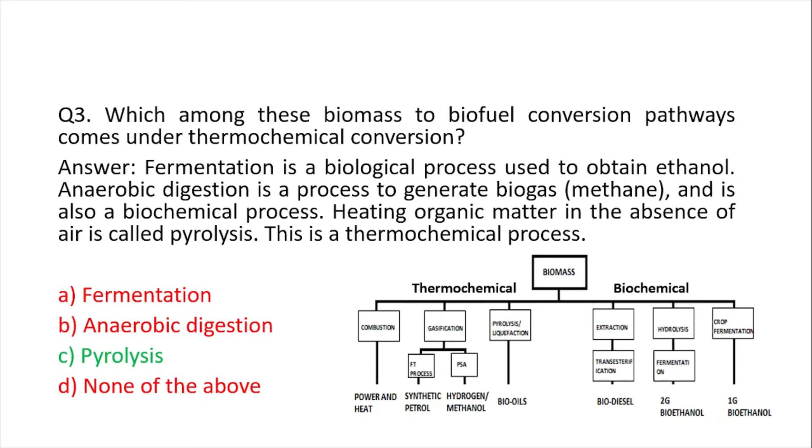Essentially, to enhance the ethanol industry in India, the government has introduced certain measures. The first measure was the use of multiple feedstocks. Then there is differential pricing, which is basically having different feedstocks to produce ethanol.

Like B heavy, C heavy molasses, sugar syrup, damaged food grains, or maize, and surplus rice from the Food Corporation of India. The difference between B heavy and C heavy molasses is they're byproducts of the sugar industry, obtained at different stages of the refining process, and normally C heavy molasses has higher sugar content and is easier to convert into ethanol.

So this costs less - the cost of converting C heavy molasses into ethanol is lower than that of B heavy molasses. So based on the feedstock used, the government said they will procure it at different rates based on the costs incurred. That is known as the differential pricing policy.

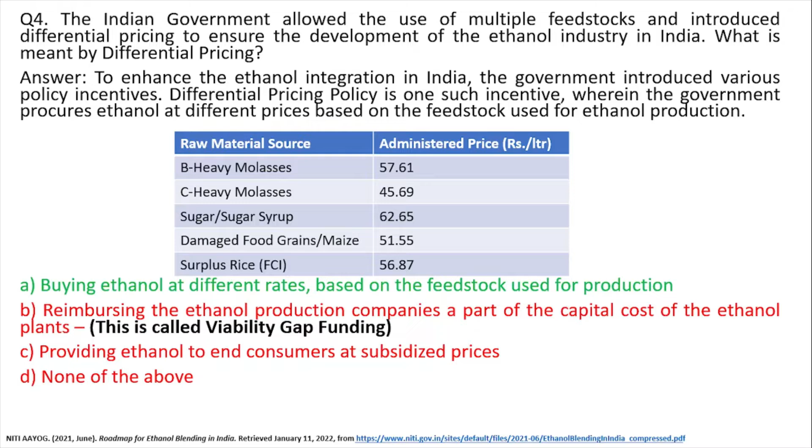And option B, reimbursing the ethanol production companies a part of the capital cost of the ethanol plants - this is called viability gap funding. This is also part of the policy for second generation ethanol, but for first generation, not so much.

The next question: why is biomass considered a carbon neutral source of energy?

Biomass is basically recently living organic matter derived mostly from plants, though there is animal matter also. Plants absorb carbon dioxide and release oxygen through photosynthesis. The CO2 that they have absorbed is the same amount of CO2 that is released when you combust biomass. Because of this, there is no new CO2 being added to the atmosphere, so we consider this carbon neutral.

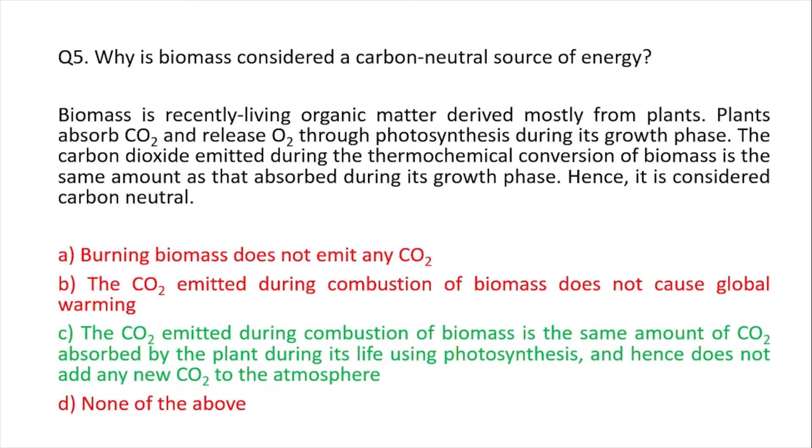Number 6: electric vehicles have no tailpipe emissions, but they also contribute to greenhouse gas emissions. So how do they do that?

There are two things here. First is manufacturing of the electric vehicle components, which requires electricity as well as other resources, so indirectly the manufacturing process also emits CO2. But also during charging, since we are using grid power for charging, we don't have any solar modules for charging yet.

80% of the total electricity was generated from coal in the month of February 2020. This is from thermal power plants that includes coal, natural gas, and oil. Renewable energy is about 10%, hydro 7%, and nuclear is 3%. All three are non-polluting, as in they don't emit any greenhouse gases, but 80% comes from coal. So that is an indirect emission, even though there are no tailpipe emissions.

So your answer is both A and B.

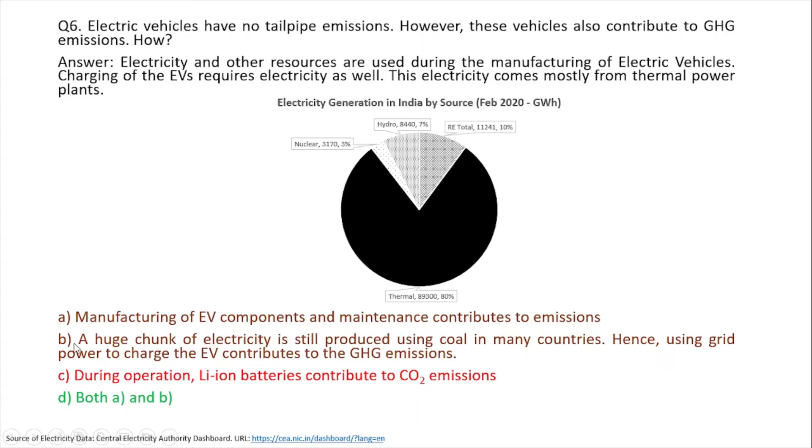Question 7: why is the sustainability of first generation bioethanol under debate despite its potential to reduce the need for fossil fuels? Initially, when you consider the environmental aspect of it, when you flood the agricultural fields...

Especially during the cultivation of rice, it creates anaerobic conditions for methanogenic bacteria or microorganisms to produce methane. Globally, 20% of methane emissions come from agriculture. There are also nitrous oxide emissions that arise from the use of nitrogenous fertilizers like urea. These are the environmental reasons.

Then we come to the social aspect of it. Diverting food grains and crops towards ethanol production, there will be a shortage of food. For instance, in India, the Food Corporation of India has allowed ethanol plants to use their surplus rice and surplus grains for ethanol production. These are perfectly good grains, so if we require those grains in the future, it will be a problem.

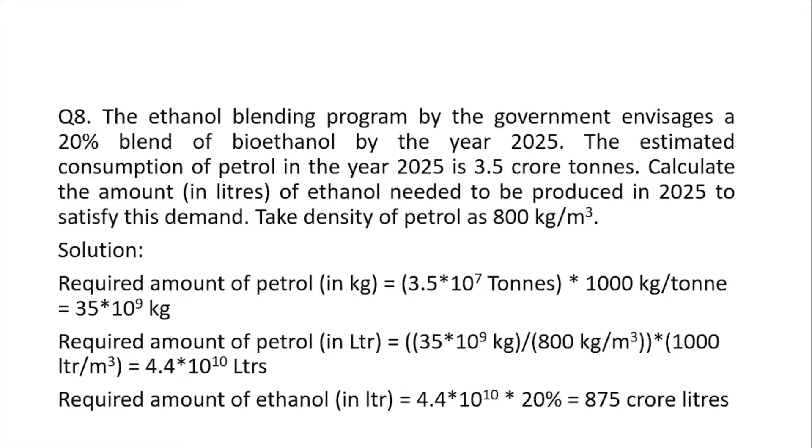So when we go for biofuels, as they are considered carbon neutral, the tailpipe emissions of carbon dioxide are all carbon neutral, so there is no new addition of carbon dioxide in the atmosphere. So this absolute value of emissions during fuel consumption will come down, although there will be some emissions during fuel production, manufacture, and maintenance. There is a huge opportunity here if we use biofuels.

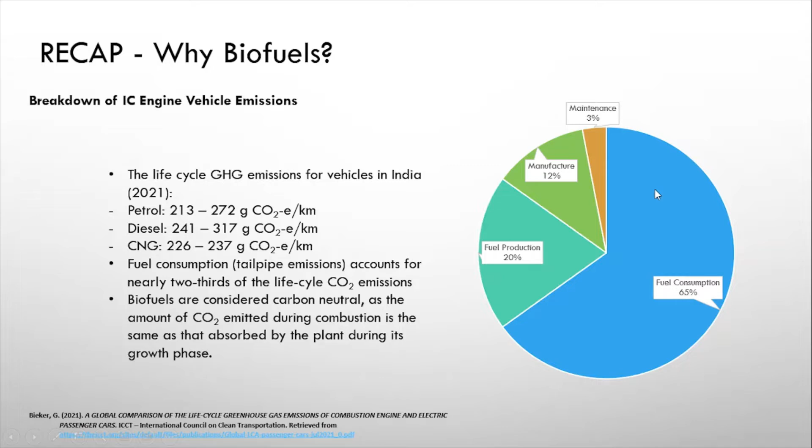A quick recap on the policy efforts in India: since 2003 onwards, there have been ethanol and biodiesel policies. In 2003, the target was 5% ethanol in petrol; today we have 20% as our target by 2025. But over the years, lack of availability of feedstock has stalled the entire ethanol program. In recent years the government has addressed certain bottlenecks, like I told you last week, and because of that we are at 10% right now, well on track to achieve 20% by 2025.

You can also see biodiesel here. A target of 20% was envisaged in 2003 itself, but now in 2018, the national policy on biofuel envisages only 5% by 2030. So you see there is a huge drop here.

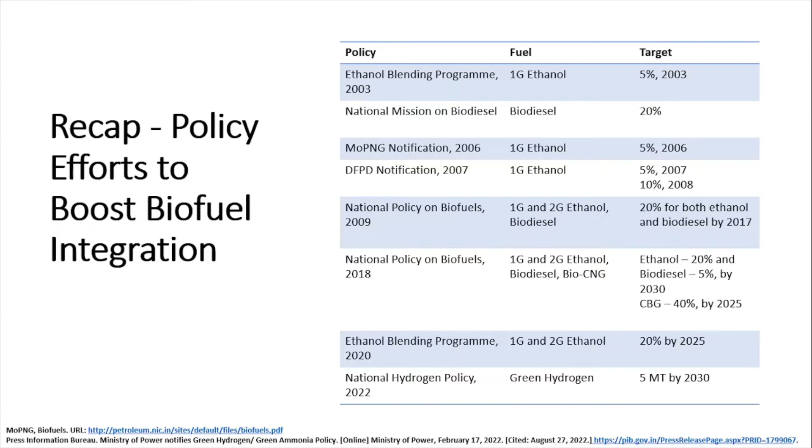So how do we know if biofuels are sustainable or not? You need some dimensions, criteria, indicators, composite indicators—the same procedure I told you in the first week about how sustainability was measured for cities. It's the same procedure, except only the parameters and criteria will change. So you have 3 dimensions: techno-economic, environmental, and social.

Normally technical and economic are clubbed together. In technical criteria, you have something called net energy ratio. It is very similar to energy efficiency, but it's a ratio of the total energy output you get to the fossil energy input—only the fossil energy input is considered.

If the net energy ratio is more than 1, note that energy efficiency can never be more than 1, because of the second law of thermodynamics. But net energy ratio considers only the fossil energy input, so your project or system is really good if your net energy ratio is more than 1.

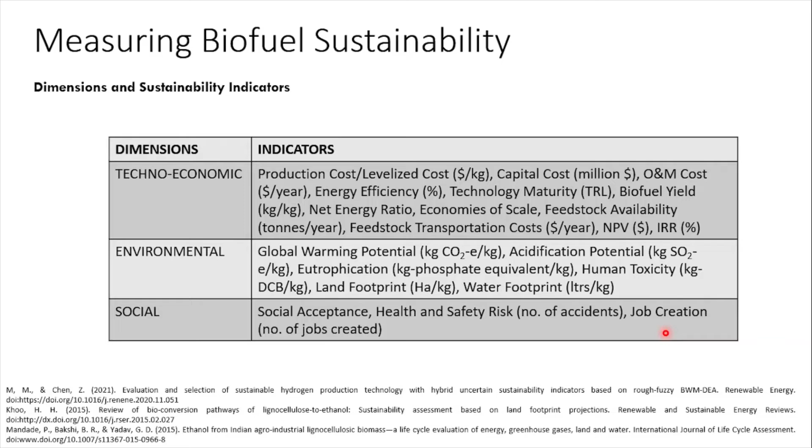So some concepts, these are economic concepts: time value of money, levelized cost, economies of scale. I'll start off with the time value of money.

Consider that you have 100 rupees in your hand today. You invest it, let's say in an FD, and that bank is giving you 5% interest wherever you have invested. That means next year at this time you will have 105 rupees in hand. So that 5 rupees is something that your money has earned.

But if you have given that money to someone, or if you have to receive that money from that person, and instead of giving it today, that person tells you they will give it to you 1 year later - it will still be the same 100 rupees, not earning any money. So instead of investing it today, you will be investing it 1 year later. That means you are at a loss of 5 rupees. That 5% which you could have earned is a loss right now, because that person says he will give it to you next year. So that is basically the time value of money.

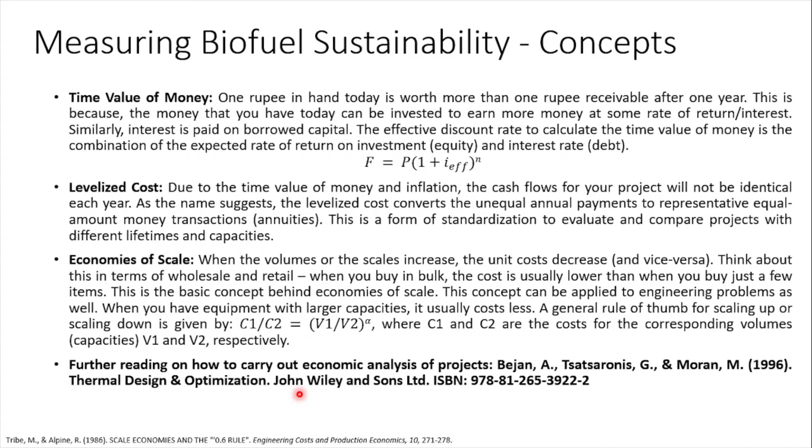A good thumb rule is you can consider this as 0.6. That is a very good approximation, and it is also given in literature why 0.6 could be a very good approximation. If you want to know further on how to carry out economic analysis of projects, you can read this book called Thermal Design and Optimization. They have excellent definitions and have explained the concepts really well about economic analysis.

Next, the environmental concepts, environmental indicators, the global warming potential. As I told you earlier, methane and nitrous oxide are also greenhouse gases, and they are more potent than carbon dioxide. Global warming potential is the cumulative radiative forcing resulting from the emission of greenhouse gases, and it is measured in kg of CO2 equivalent. For methane it is 25 times that of CO2, and for nitrous oxide it's about 300 times. So you add up all that and you get the global warming potential, which is normally measured over 20 years or 100 years.

Next is acidification. What is acidification? It is an environmental indicator that measures the amount of gases responsible for acidification of soil, water, ecosystems, and the built environment. It is measured in kilograms of sulfur dioxide equivalent. Normally, because of nitrogen fertilizers, you have ammonia and NOx emissions from the fields, and they can cause acidification.

So eutrophication: what is eutrophication? You apply these fertilizers, but the entire fertilizer is not taken up by the plant. Whatever is excess goes as runoff to water bodies and seeps into the soil. Because of these excess nutrients, there will be algae growth in water bodies, and that will take up all the dissolved oxygen within the water body, leaving less oxygen available for the creatures living within the water bodies. This causes depletion of marine ecosystems and so on. That is eutrophication, and it is measured in kg phosphate equivalent.

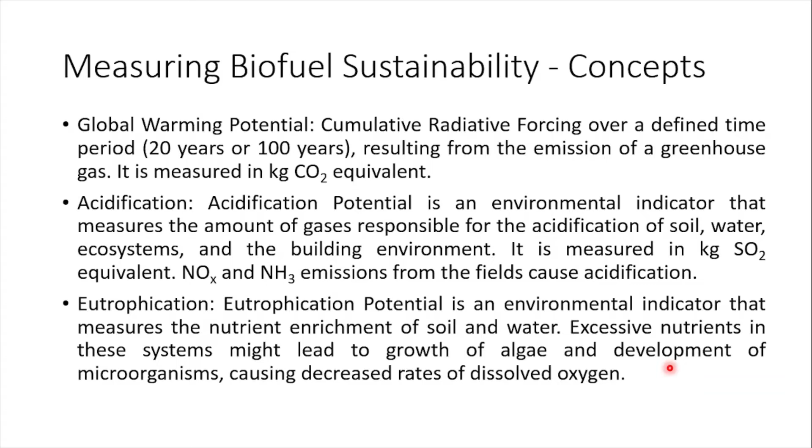So next, what is the methodology you can use? I think you would have already learned about life cycle assessment. This is life cycle sustainability assessment, which is a combination of life cycle costing, environmental and social life cycle assessment. There are four steps to do this.

The first is goal and scope definition, where you define the functional unit. That could be per liter or per kg of biofuel or something like that. And then you define the system boundaries - I'll come to this in a moment.

Second is preparation of inventory, that is inputs and outputs of the entire system. Then the impact assessment: you convert this into categories, use the inventory parameters, convert them into categories, and then quantify the impacts. And then the fourth is interpretation, that is generation of a set of conclusions and recommendations.

So when we talk about system boundaries - I think last week we would have had a lecture about the LCA of a product itself, the life cycle of a product. Here we are talking about the process.

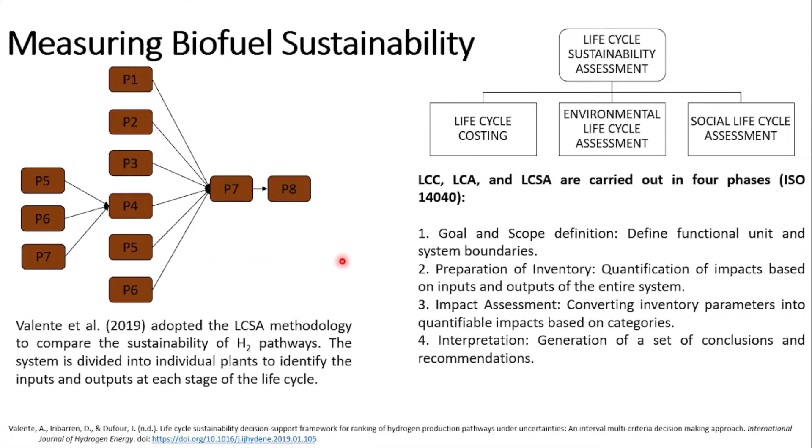So let's say that we are producing biofuel here. There are many different processes that go into producing biofuels. So you set your system boundaries. Let's say I'm starting from the agricultural field - that's my starting point. Then I have various different plants and various different inputs and outputs that go into different plants, and finally I have this biofuel conversion plant, and I have my biofuel output. So I set my functional unit, and I divide it into many different processes or plants, and then I analyze the input and output for each plant. That's how this is basically done for a process.

So then one of the most important indicators to measure biofuel sustainability is feedstock transportation. Why is it very important? The feedstock transportation cost is dependent directly on the distance traveled, and it is inversely dependent on the carrying capacity of the vehicle, that is the weight carrying capacity of the vehicle. So let's say you have some vehicle, and the volume of the vehicle is fixed.

If the volume is fixed, there is something called bulk density. What is bulk density? It is when you take a bulk of the biomass and put it in a huge container like a truck - the volume that this weight of biomass occupies is called bulk density. If there is loose biomass, there is a lot of void space in between - it is not compressed or densified. So if you just take loose rice straw or something and put it into a truck, you're not going to be able to transport a lot. But if you pelletize it or densify it - pelletization or briquetting - that will increase the bulk density of the biomass, and because of that you will be able to transport that densified biomass in fewer trips. So bulk density is very crucial in deciding the transportation cost.

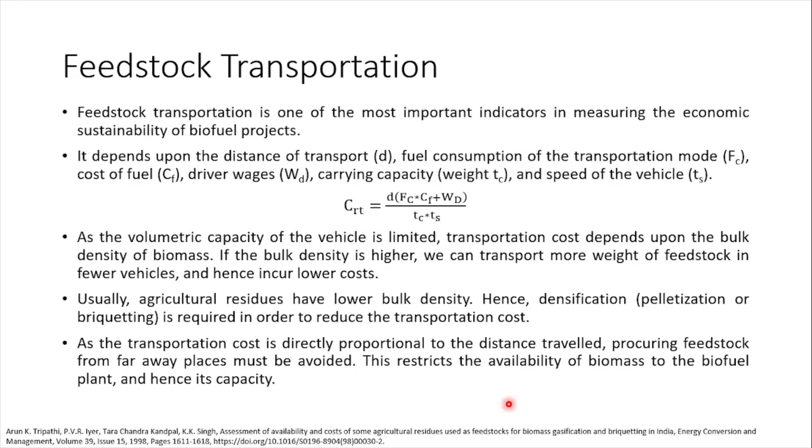So we come to the case study of ethanol production in Maharashtra. This study has optimized ethanol production based on regional resource availability, and it evaluates the potential for ethanol production in 33 districts of Maharashtra, with some constraints - I'll come to that shortly. The study considers 4 objectives - this is a multi-objective optimization, I'll explain what that is: increasing farmers' income, reducing ethanol costs, reducing water footprint, and reducing irrigation water utilization.

Now, if you look at the first 2 objectives, increasing farmers' income and reducing ethanol costs, they are conflicting, because if you offer them more price for their biomass, you're increasing their income, right? But if you do that, you're also increasing the cost of ethanol, because you've just paid more to procure biomass. So these 2 are conflicting objectives, and there needs to be some trade-off between the two. So this study uses a Pareto optimization - I'm not going into the details of what that is - basically to forge a trade-off between conflicting objectives. So sorghum, wheat, and cotton are the most recommended crops for ethanol production, and Jalna, Kolhapur, and Pune are the most selected districts.

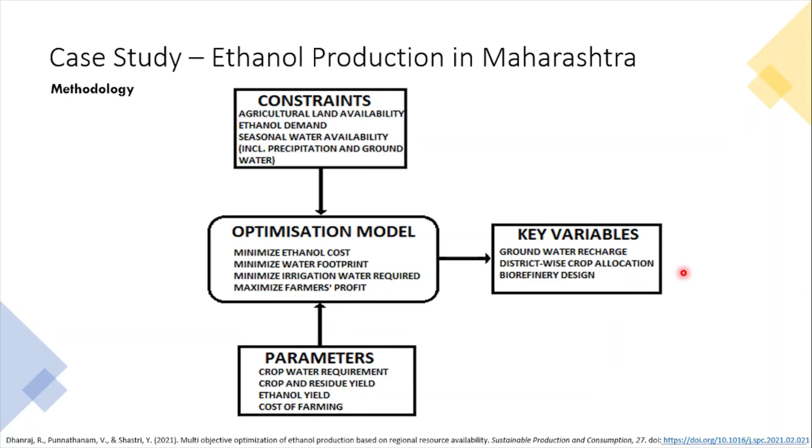And these are your outputs. So how much groundwater recharge is happening, so this goes into these constraints as well, because if more groundwater is available, you will require lesser irrigation water, right? So then there are another two outputs: district wise crop allocation and biorefinery design.

But like I said, these two are conflicting objectives, and you have to use Pareto optimization to arrive at, let's say, a midpoint, based on what your requirement is.

So if we say the government will be more interested in this, maximization of farmers profit. In the past few years, the government has been talking about doubling farmers income and so on, so they will be more interested in this.

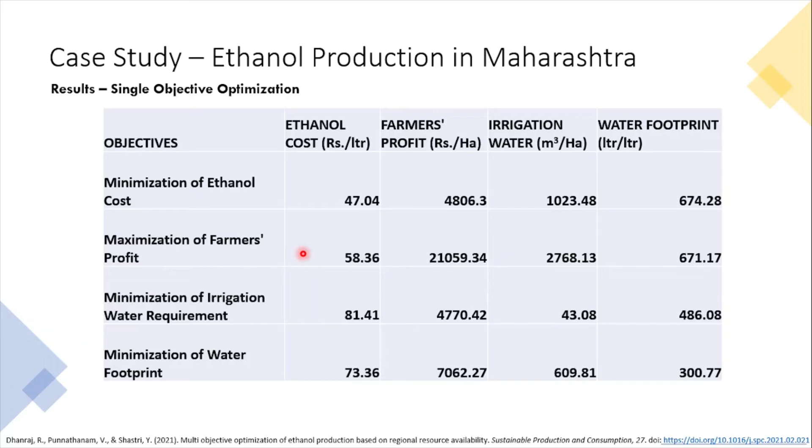But as an ethanol production company, or even as a consumer of ethanol, we'll be more interested in the minimization of ethanol cost. So based on the objectives, we need to decide what's important for us and then choose from that.

So based on these objectives, there are some preferred districts where biorefineries can be located. If you want to minimize ethanol cost, you have to locate your biorefineries in Jalna, Pune and Kolhapur. And if you want to use less irrigation water, then you have to go to Aurangabad and Satara. Similarly for water footprint and farmers profit.

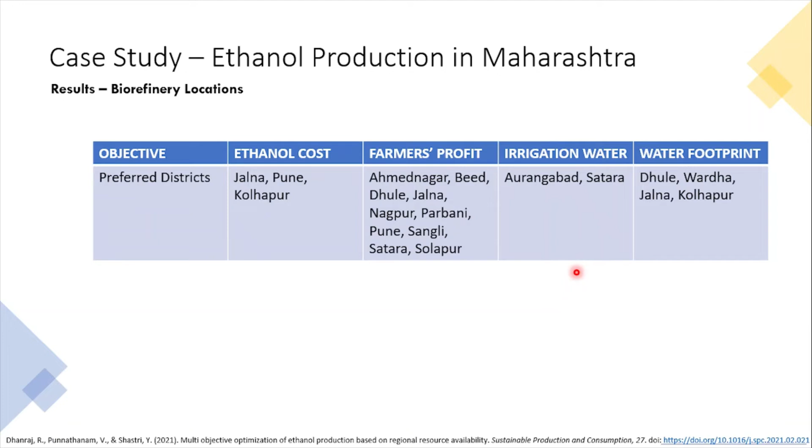Okay, these are just some results. So yeah, we are at the end of the lectures. We'll just go in for the questions for this week.

The first question is: vehicle exhaust, that is the tank to wheel emissions, account for about 2/3 of the life cycle greenhouse gas emission of fossil fuel vehicles, as you've seen in that pie chart in the recap slide. So if you replace them with biofuels, how will it aid in enhancing environmental sustainability? Options: A, biofuels emit lower CO2 than fossil fuels during combustion to produce the same amount of energy. B, the carbon dioxide emitted to manufacture biofuel compliant vehicles is lower than that of conventional fossil fuel vehicles. C, the carbon dioxide emitted from biofuel vehicles is carbon neutral, because we are not adding any new CO2 to the atmosphere. Or D, all of the above.

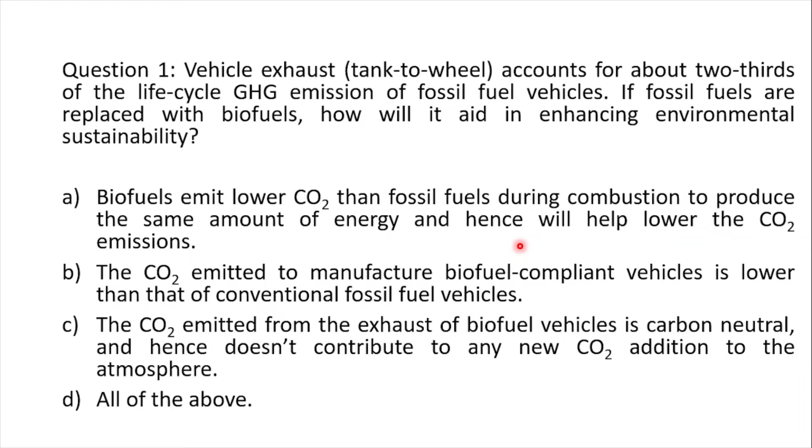I hope the question is clear to you, I'll just read it out again. Vehicle exhaust accounts for about 2/3 of the GHG emissions of fossil fuel vehicles. So if you are replacing it with biofuels, how will it enhance environmental sustainability? A, does it emit lower CO2 than fossil fuel vehicles itself, or B, because the manufacture of biofuel vehicles emits lower carbon dioxide, or C, the CO2 emitted from biofuel vehicles is considered carbon neutral, or D, all of the above.

Second question is, which of the following statements are true? A, levelized cost is an equalized cash flow for equal time periods. B, money receivable a year later is worth more than the same amount of money at hand today. So let's say you have 100 rupees at hand today, and you have 100 rupees receivable 1 year later, which is worth more, that's what this option is.

C, the unit cost of an equipment will be usually higher for higher capacities. Or D, both B and C.

Third question is, which of the following statements are true? A, methane and nitrous oxides are more potent greenhouse gases than carbon dioxide. B, NOx emissions and ammonia emissions cause acidification of soil and water bodies. C, excess nutrient runoff causes eutrophication of water bodies. Or D, all of the above.